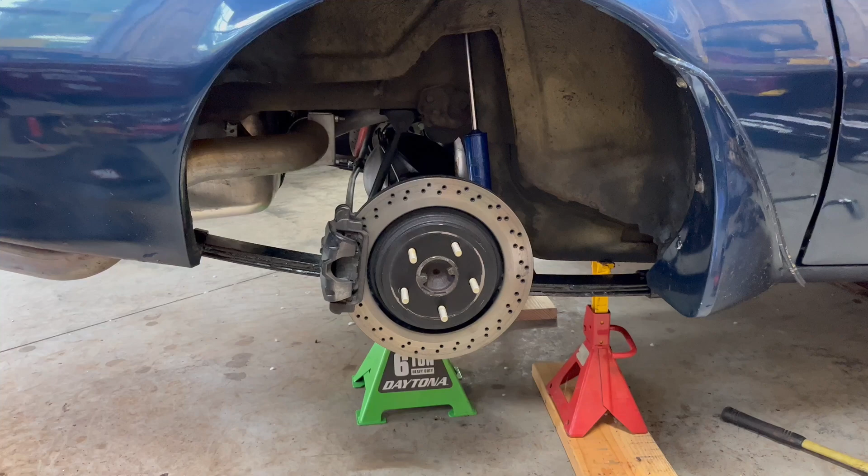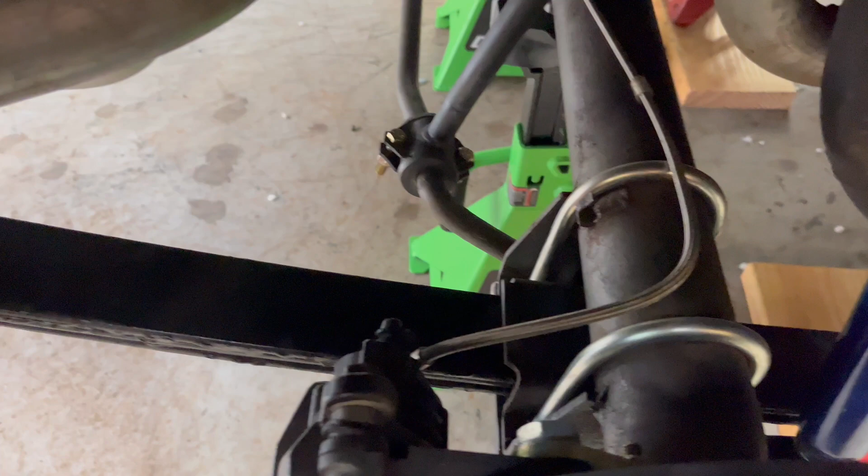As I've said in my last video, all the rear suspension parts for the Firebird have come in, and I finally had a chance to start working on it. As always, this is the first time I've ever done leaf springs, so it was a learning experience. So I did the passenger side just to get acquainted with the process, and I'm gonna get ready to do the driver's side.

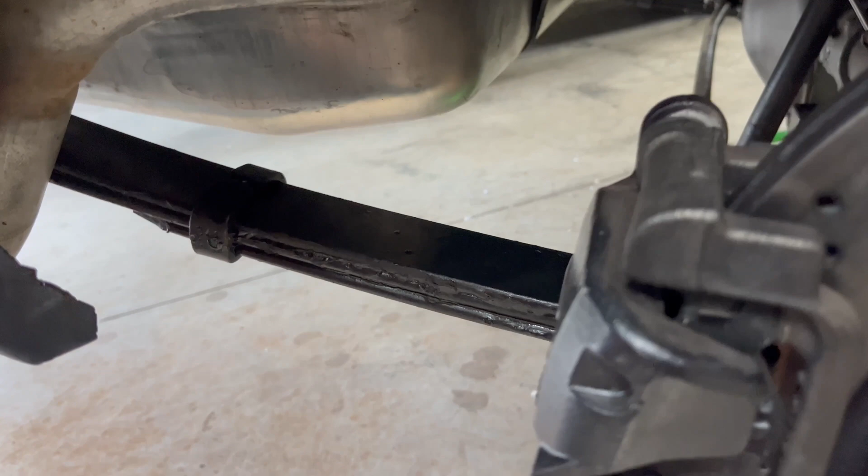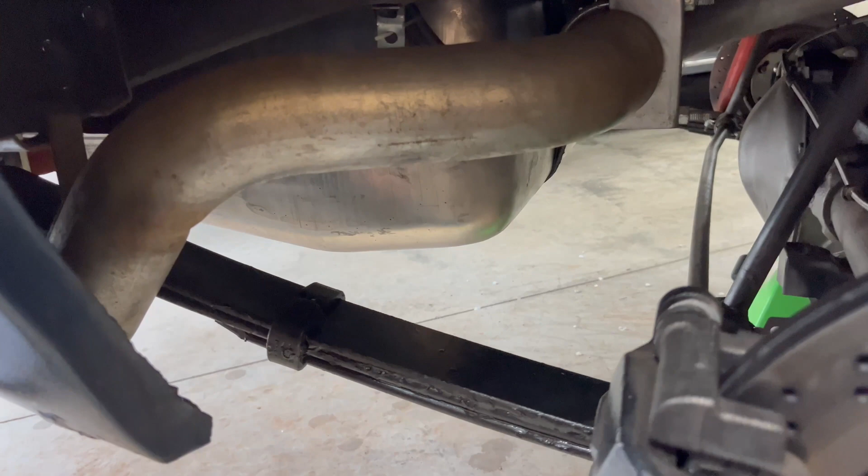I decided to do this backwards so I can go over a couple of things before I go to the other side. First, and the most important in my mind, is the gas tank. If you have the original rubber bushings in the back where the shackles are, if you can, get rid of the gas tank, drop it, because those things get stuck in there, and with the gas tank in the way, it turns into a real process.

I was able to do it without the gas tank out of the way, and it turned into a pain. A couple of the bushings up on the frame end were caked in there, so it took forever with a small C-clamp and a socket to push them all the way out. That would have been easier if the gas tank wasn't in the way. I would have punched it straight out. Same way during installation, it just gets to be a pain.

So I know a lot of people say you can do it with the gas tank in, and you can, but it takes so much longer. Unfortunately, I had a full gas tank and no way to empty it, so I kept the gas tank in place.

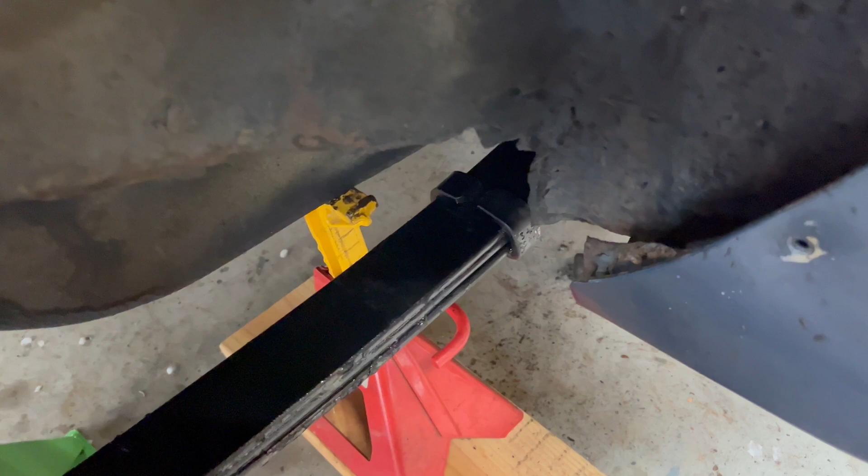Second thing is, if you can have somebody give you a hand, it makes life so much easier. Again, I did it by myself, and it was a bear, especially putting it back in. It was an absolute nightmare, especially trying to get the bolts in at the shackle end with one person trying to make sure everything works. So either way, the thing is in.

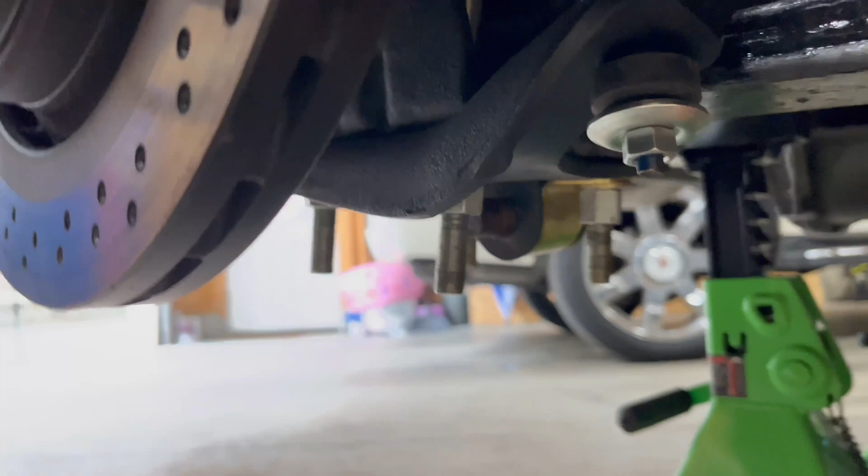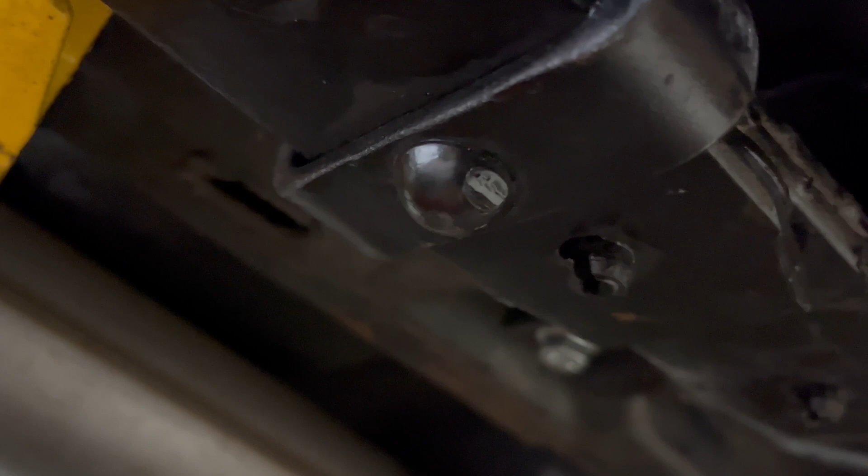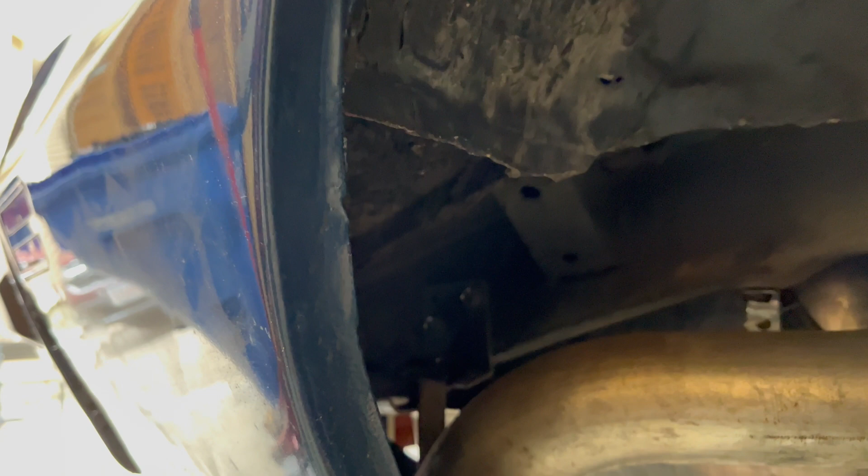I got all new hardware for the sway bar bushings. Also, the kit came with all new hardware for the leaf spring pad, and new hardware for the leaf spring bracket in the front. On this side, I've tightened everything except the bushings on either end of the leaf spring. Those stay relatively loose until you put the wheels on, and then you shake the car up and down a couple times so everything settles, and then you can tighten it.

Also, I have the shock in, but when you do that, the shock needs to be out. I'll just pull it out and go through the motions of the suspension, and then put the shock back in and tighten everything to spec. So I wanted to show you a couple of things.

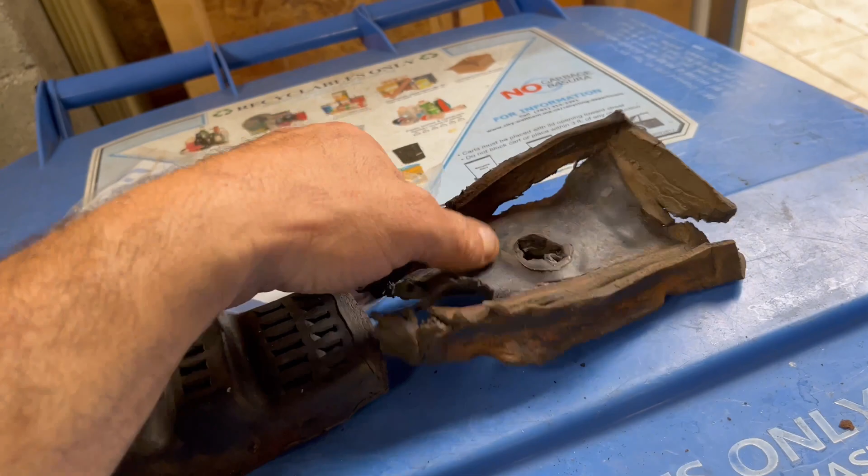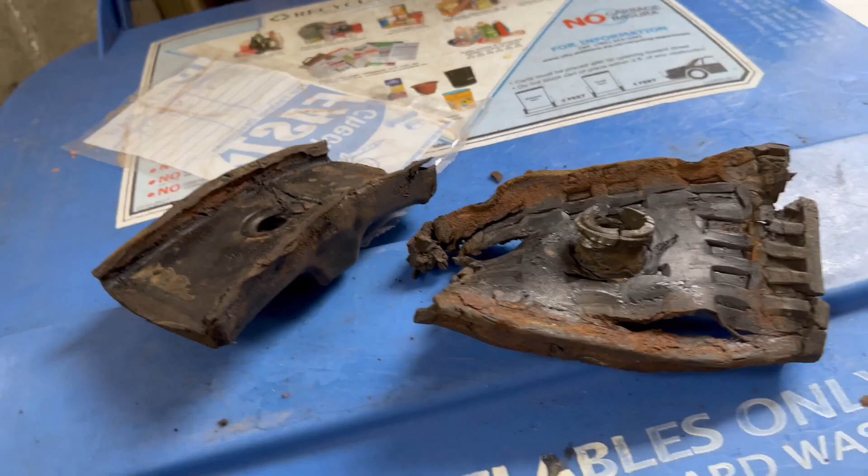These are the original spring pads. This is the bottom one. You can see how bad that is. And this is the top one that sits between the axle housing and the spring. And somewhere here, believe it or not, there's still the factory part number, 477818. I can't make out what the others are. FK something, but I couldn't find a part number on this one. Those are the spring pads.

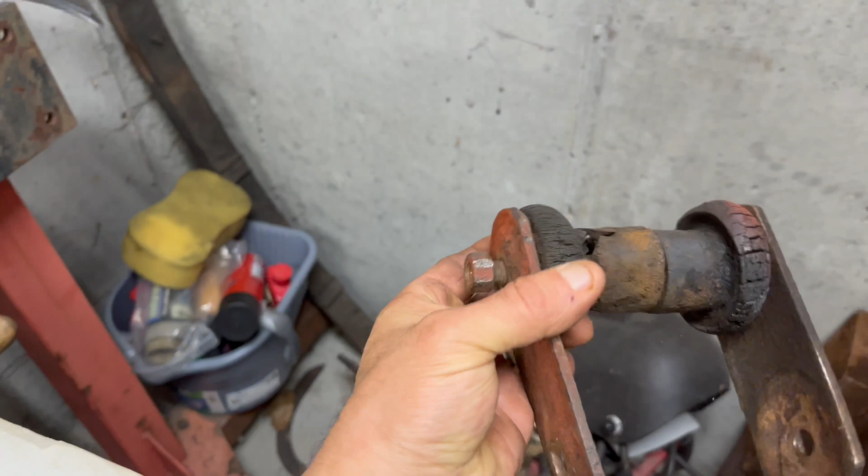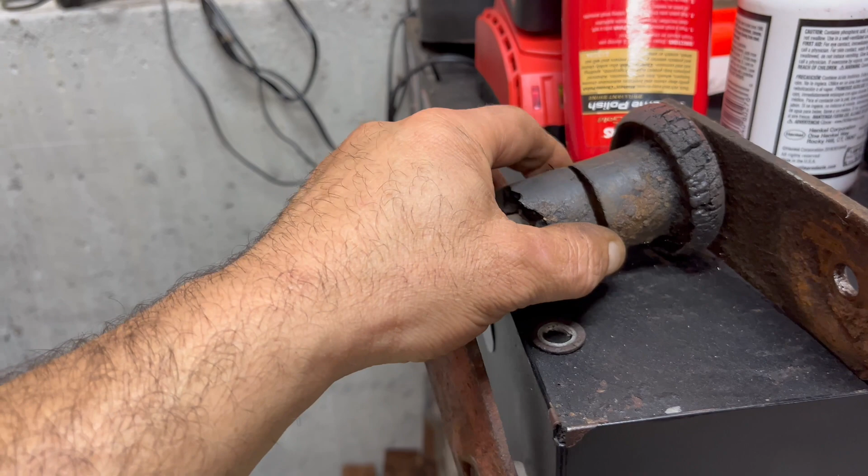And if we go over here, you can see the condition of the bushings. That's the bushing up top. When I took it out, this part stayed in the housing and would not budge. You can tell it's stuck in there. That's the one that I had to use a C-clamp to push out, and it took a couple hours of working it back and forth. Finally got it out.

If the gas tank was not in the way, I would have just pressed it from here, got a little extension with a socket on it and a hammer and just hammered it out. But since the gas tank was in the way, there was no room, so I had to improvise and come up with a C-clamp that just pushed it out barely. It was a small one too, like a 4-inch C-clamp, barely got it.

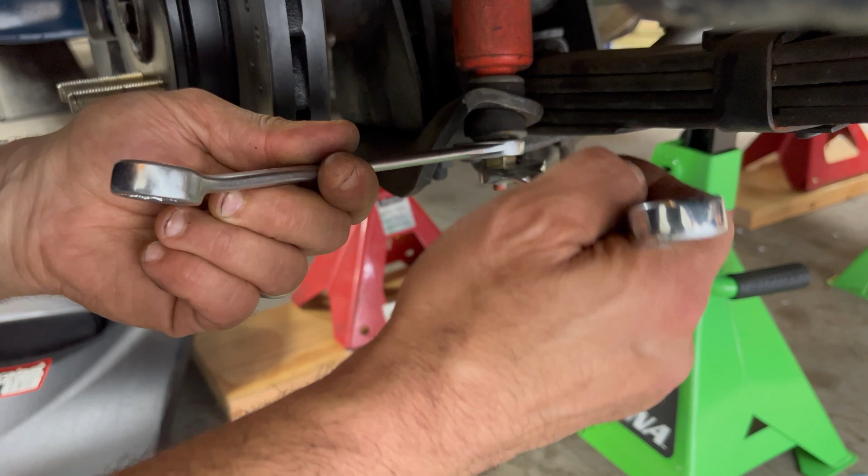So now I'm going to start taking apart the driver's side. I'll film that one a little bit because now I have an idea of what I'm doing. I didn't have an idea when I was doing the passenger side. So here we go. We'll start by taking the lower nuts off the shock.

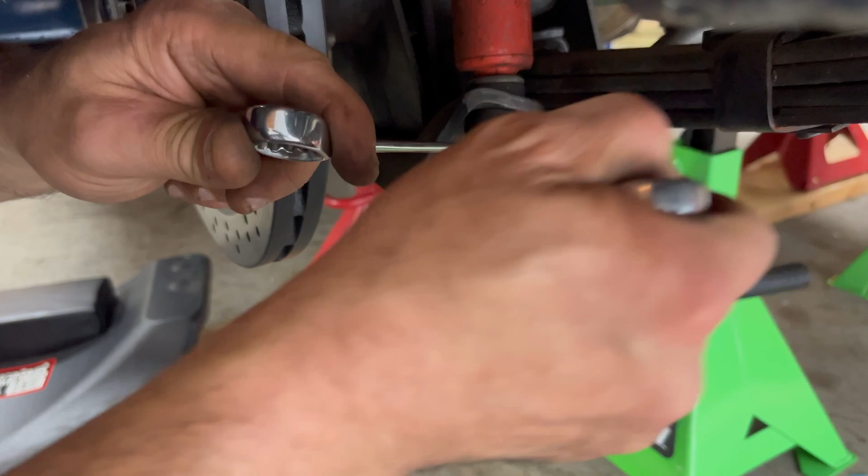Mine is a Koni and those have 17mm nuts, so yours will vary depending on the shock. We'll have to take those 2 bolts out. They're 1/2-inch head bolts for the upper shock mounts. So once the shock is loosened up, now we can start with the spring.

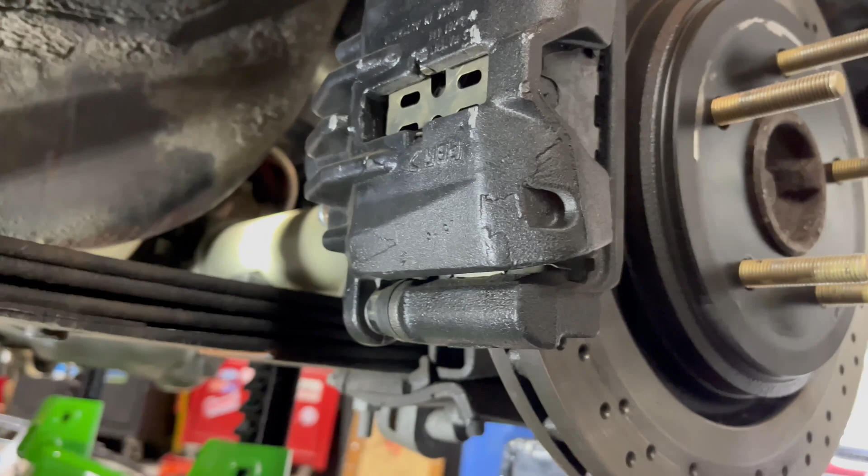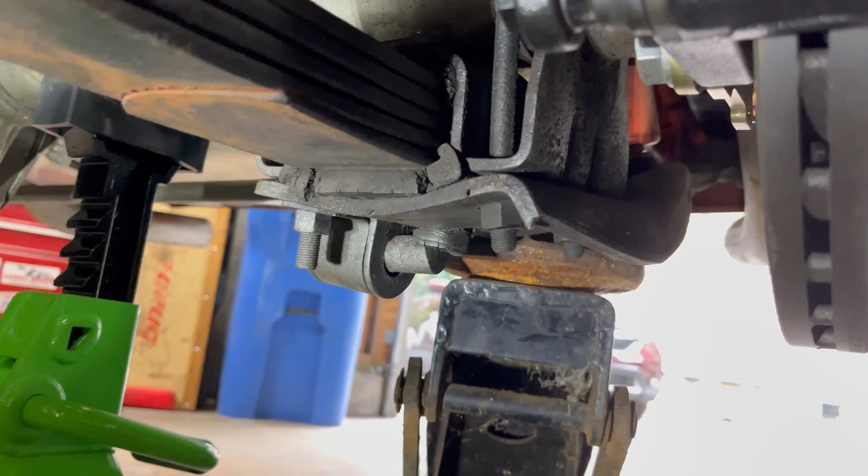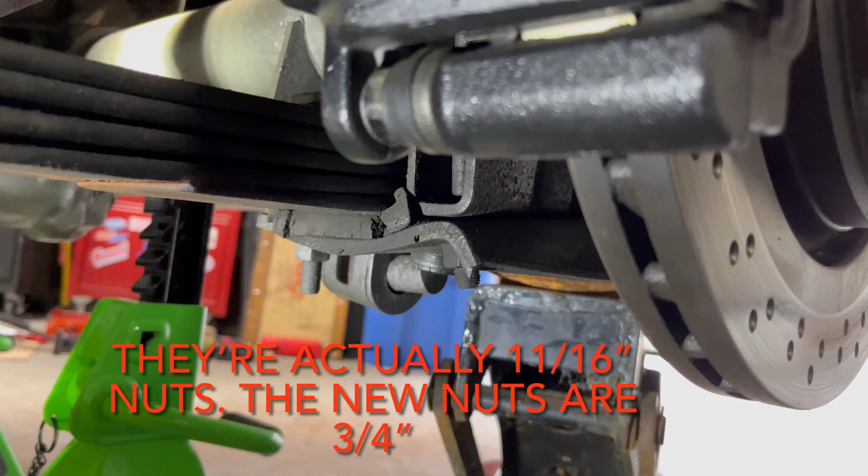Make sure you have jack stands under the rear end and then also under the frame so you can support the car. And then start taking it apart. The bolts for the bottom plate are 11/16. So I'll get the gun with the 11/16 socket and start getting at it. And then we'll move here.

The front spring pocket has 3 bolts. 1, 2, and then there's a 3rd one in here hiding someplace. There it is. That's the 3rd one. I got lucked out on the other side. They came out very easily, so hopefully this side will be the same.

You can see the bushings are rotted. I'm gonna show you here. You can see how the bushings are completely gone. So like I said earlier, I had a tough time getting those out. The top one especially. The bottom one comes out with the spring, so that's not a big deal. The top one is the key. Hopefully I can get it out easier than the other side, but we'll get there soon.

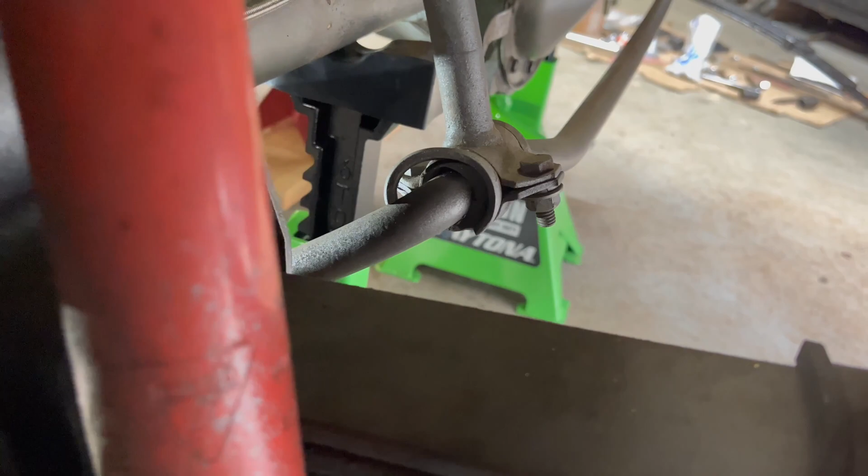I'm gonna start taking the bottom plate bolts, and also make sure you have a jack underneath the leaf spring so it doesn't bounce down on you. We'll do the sway bar link, and that will free up the plate to drop. All 4 bolts or nuts came free, so we're making good progress. Basically the car's rear suspension has never been apart. It's coming out pretty good.

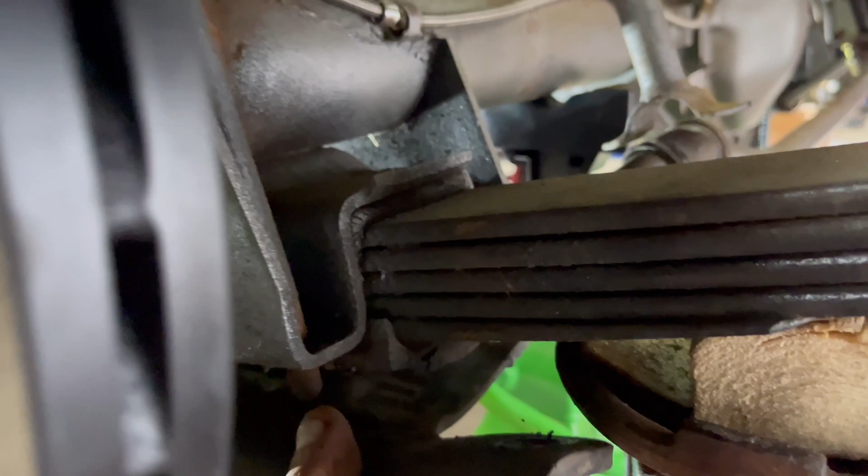I did change the sway bar bushings like 30 years ago, so at least the sway bar bushings have been out once, so those bolts are a little easier, but either way they're still old, so we'll take those out and then we'll start with the front spring eye pocket and then we'll move to the rear shackle. The plate out, the shock can come out. And there's the spring plate.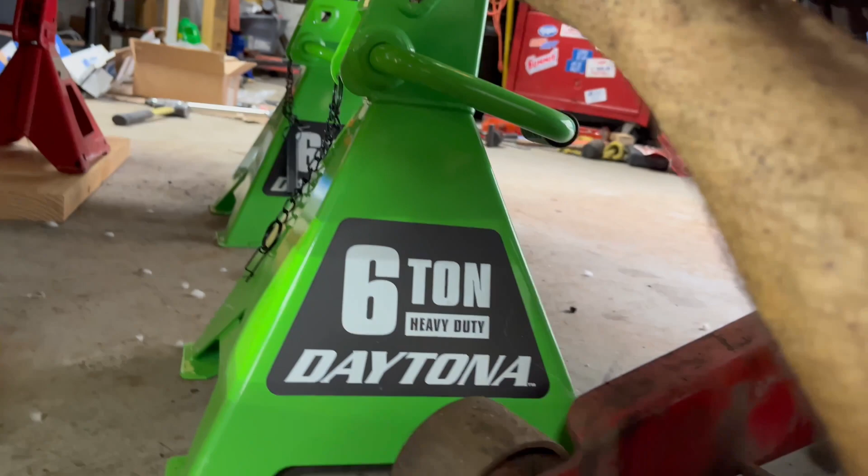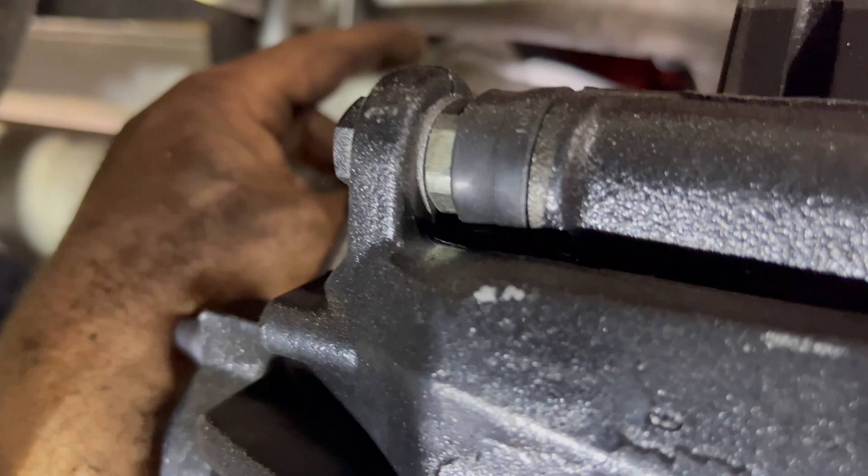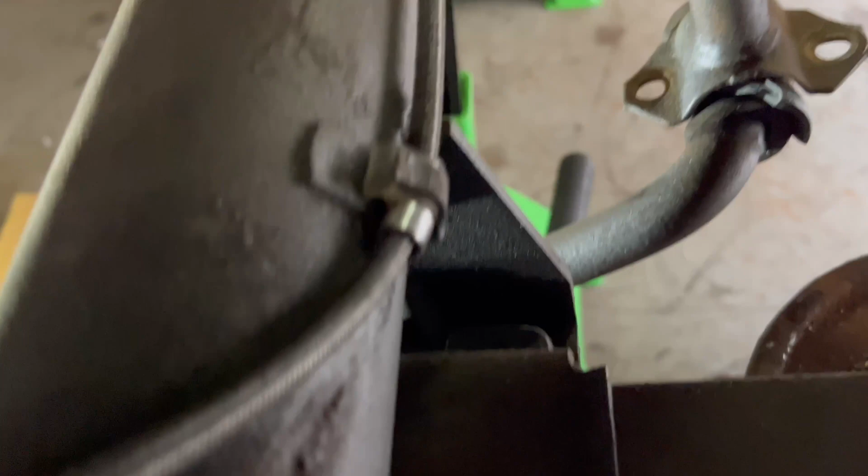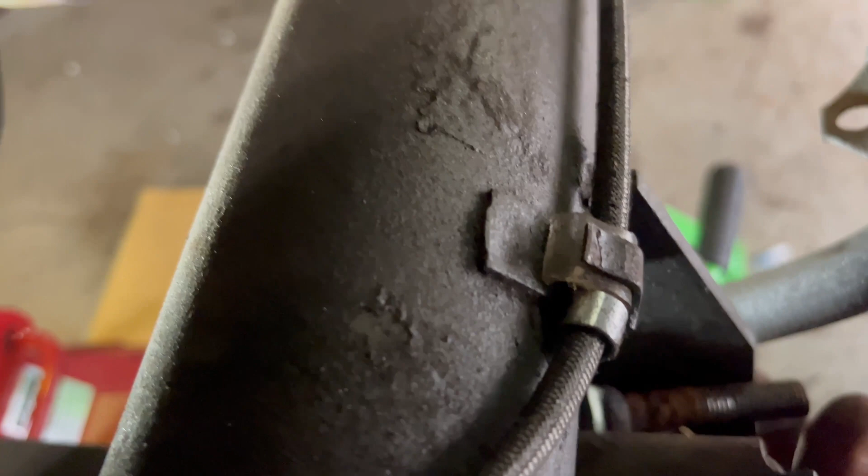Once you loosen up the sway bar and the shocks, there are U-bolts on the inside, and then be careful of the brake line, but there's the U-bolt here, and then there's another U-bolt here. That comes out. So the middle part of the spring perch is out. Now we move to the front.

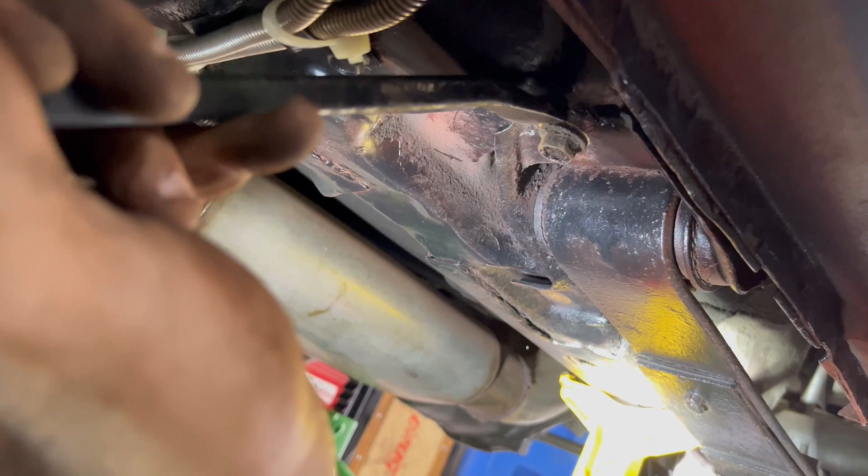We get those 3 bolts out of there. See how it goes. 2 out of the 3 bolts came out. This one decided it didn't want to cooperate and is just rotating inside. I think the clip inside is broken. So 2 ways: either put pressure on it with this, push it down a little bit and get the bolt out that way, or when I drop the rear shackle, put some weight on it, get the bolt out that way. See what I can do.

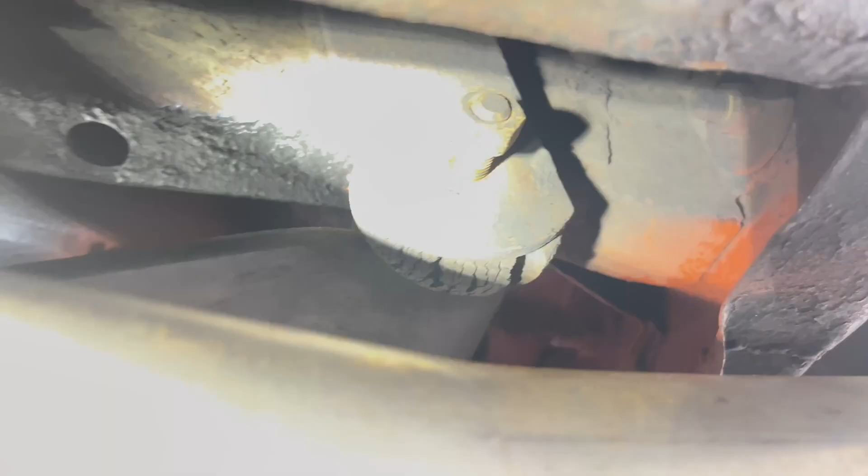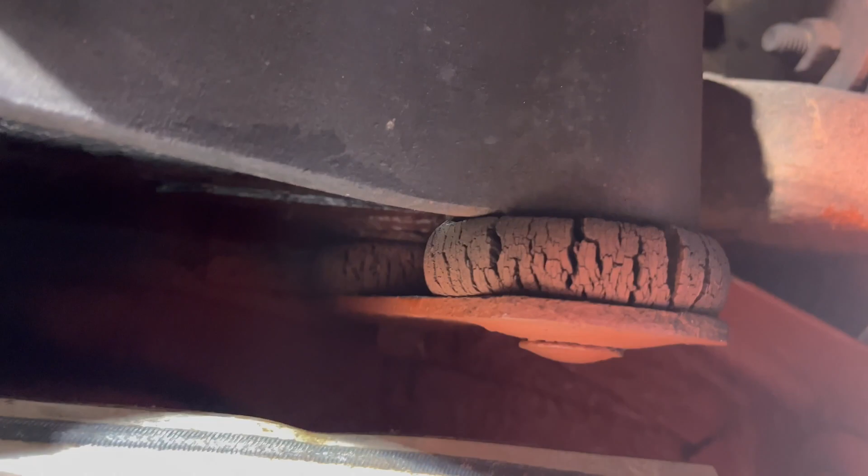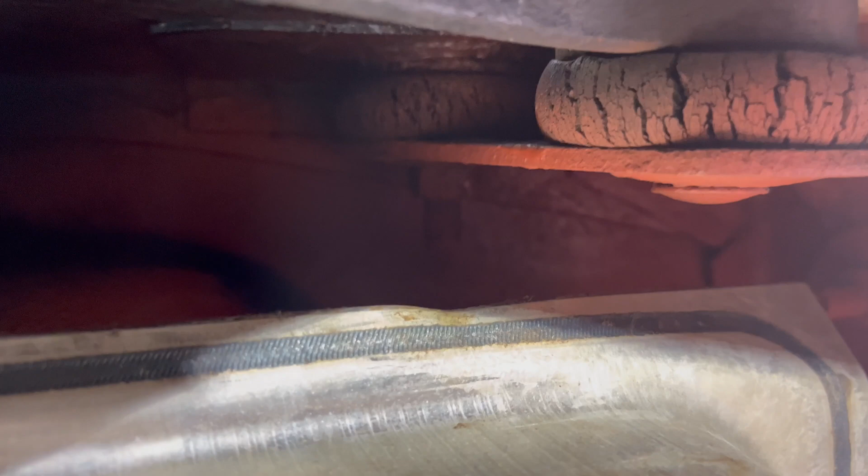I'm starting to take the shackles out. It's an 11/16 nut. And like I said at the beginning of the video, the gas tank gets in the way. So there's the bolt head, and it has no room. There's like an inch, maybe inch and a half room for the bolt. So that means I have to take the top shackle out for the whole spring to come out, which is a pain in the neck. Hopefully that bolt will come out.

That one, you can push the bolt out up top, and there's enough room in the back there between that and the rear fender for the bolt to slide out, hopefully easily, and the whole thing will drop. So again, if the gas tank was not there, you can just bang this bolt out, the spring will come down, and then you can take the top shackle out much easier, but whatever. It is what it is, we'll make it work.

So I'm gonna continue taking this nut out, and then we'll start with the top one, and then the whole thing drops. Once that drops, go back to the front spring pocket, the front bolt. Hopefully with enough weight on it, it will start backing out. So see how it goes.

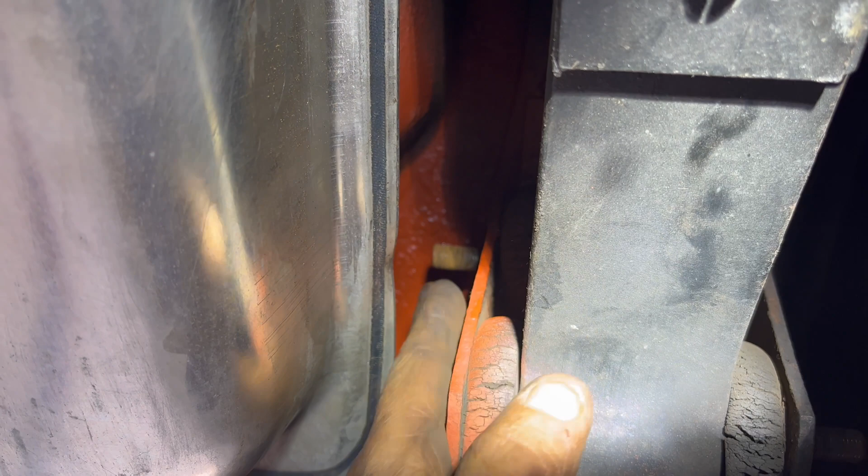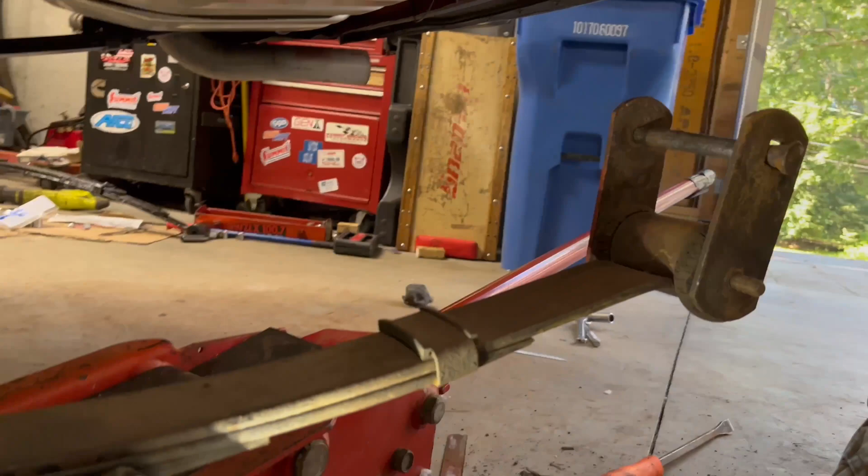So both nuts are out. Again, if the gas tank was not there, I would have hammered that bolt out, but I gotta C-clamp it out because it's in there. It's never been undone since it left the factory almost 50 years ago. So it's gonna be fun, just like the other side. I've got to put a pry bar here and move it around, and then get my C-clamp and put it there and press it out, see what happens. So after struggling with it, got the upper shackle bolt out.

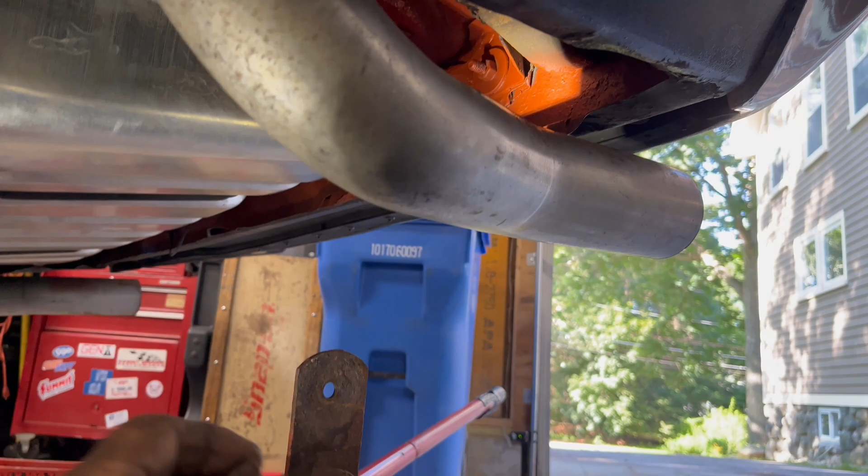I went with the Sawzall, because that thing was in there. But now the fun part comes in. As you can see, the bushings are in there, and they're in there pretty good. So probably gonna do like the last time, go in there and get as much of it as I can, and the rest of it I have to get the C-clamp again with a socket and start. Hopefully I can press it out and see what happens.

This side came out easy. It's like a couple of minutes, and I was able with my pry bar to pry them out. So it's the first good thing that happened today on this setup. Anyways, onward. I'm just gonna clean the hole a little bit, get rid of all the dirt and stuff, and then continue on. Probably press the new bushings in, and then see if I can get the spring perch off, the old leaf springs, and then we'll restart the assembly.

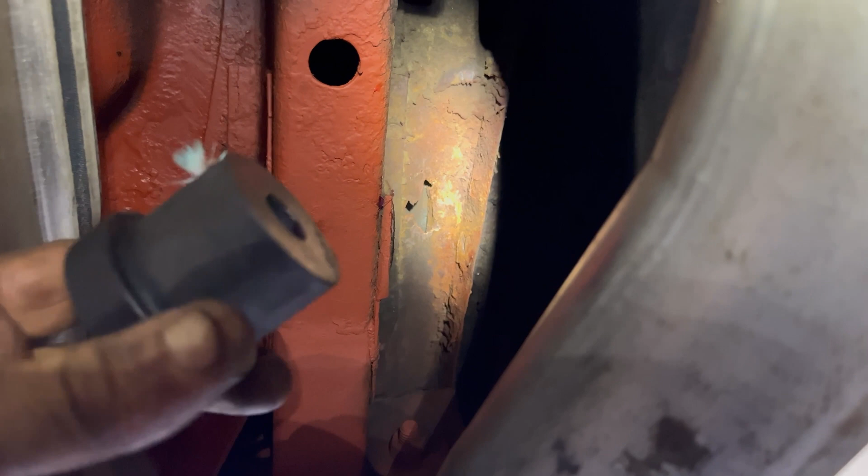So the next issue we'll run into is the kit was supposed to come with the rubber bushings for the frame side of the shackle, so it will slide in easier, but it didn't. It came with poly bushings, and there is no way this thing is sliding in there. It's like less than a 1/16 of an inch difference between the diameter of this one and the original factory one, and there's just no way. It just will not.

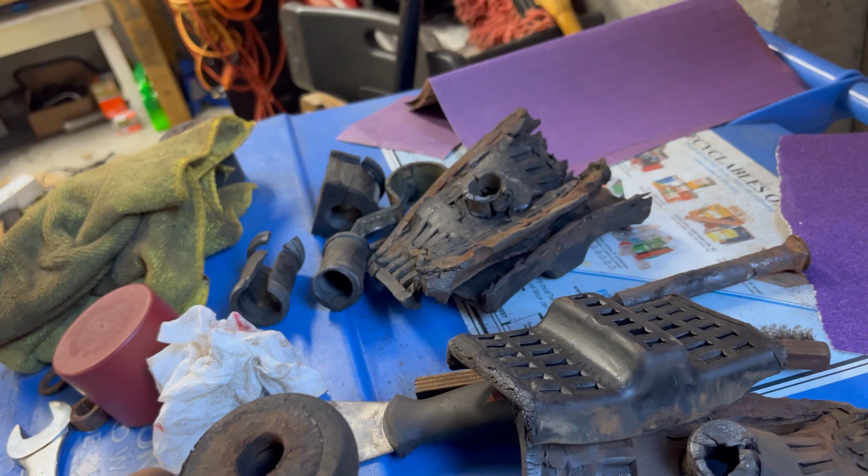So what I did on the other side is I shaved a little bit of the outside diameter, just enough so I can press it in. So that's what I'm gonna do. Since I have the old factory ones that came out, I'll just show you the difference. Since the polys won't compress like the rubbers, it just will not go in there. So let's see. So here's the, it's barely visible, and it's almost the same size, but the poly is slightly thicker.

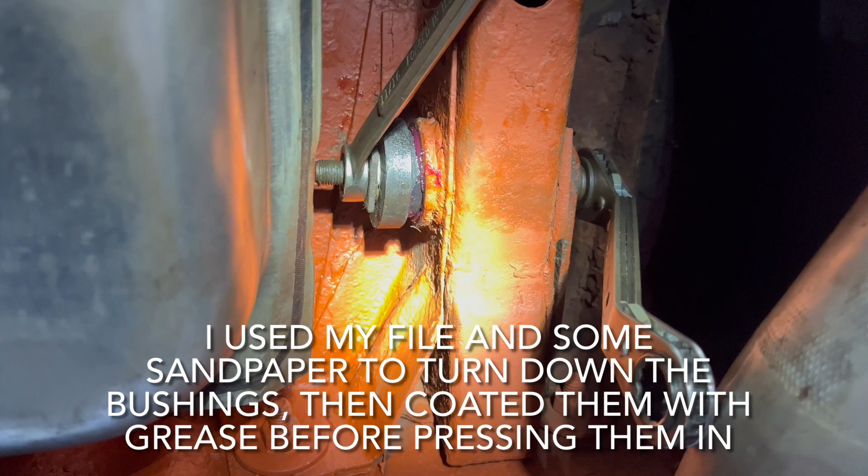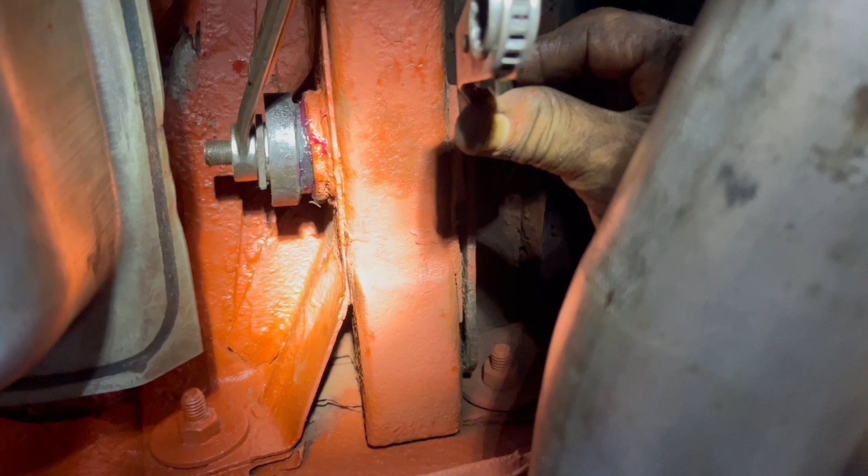And so here, pressing the bushings in, I just got a long bolt and nut and some washers. I used the shackle plate on the empty side and just nut and bolt, and then pressing the bushing in. As the bolt tightens, obviously it's pushing the bushing in all the way, almost there, probably like less than a 16th, and it should get there. Once that's done, I'll take it out and press the other side, and then the bushings are ready, and then we'll start the reassembly. So pressed in the other side too, so the frame side bushings are both in and ready to go.

So we're back at it this morning. I got the spring perch out. I had to sawzall the bolt because it was not budging. I think over the past 49 years or so, it's welded itself to the bushing. So hack it off, clean it up a little bit, give it a coat of paint, and then we'll start reassembling this new spring. So we're waiting for the paint to dry on the front spring perch and start reassembly.

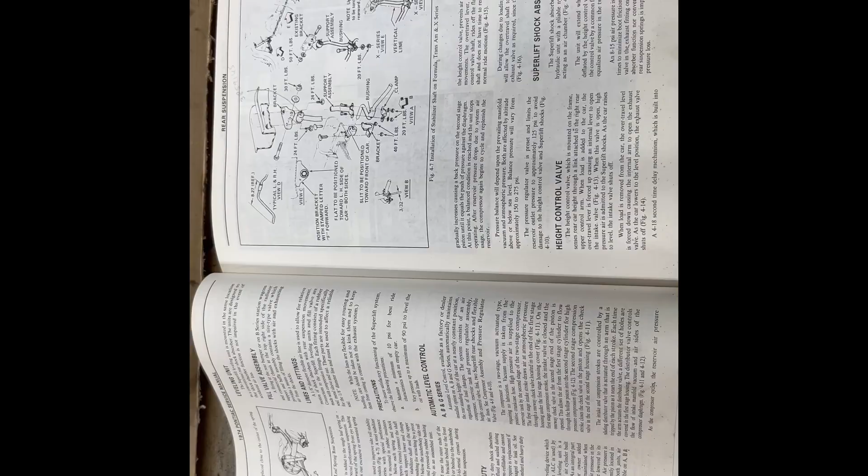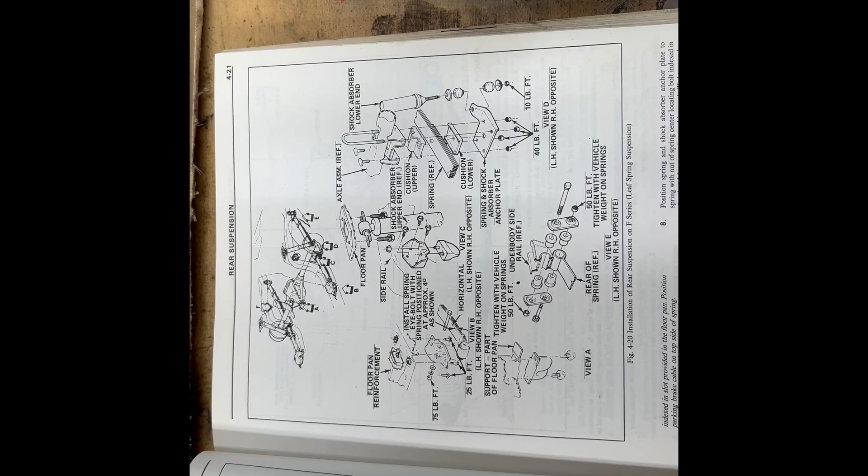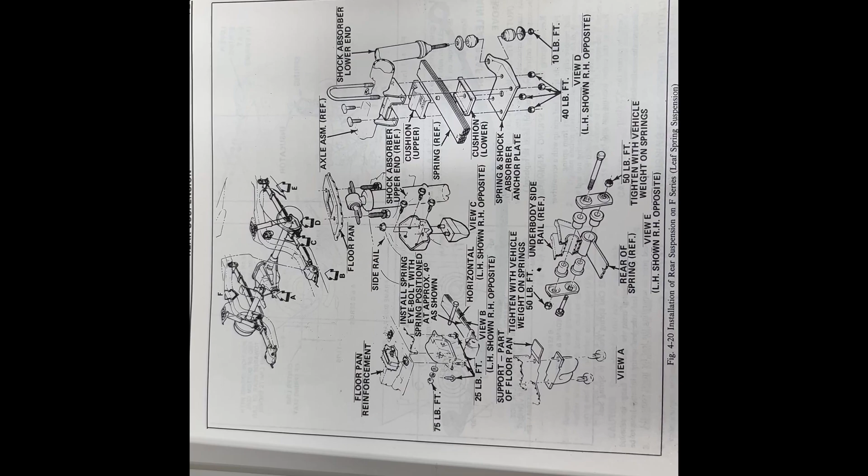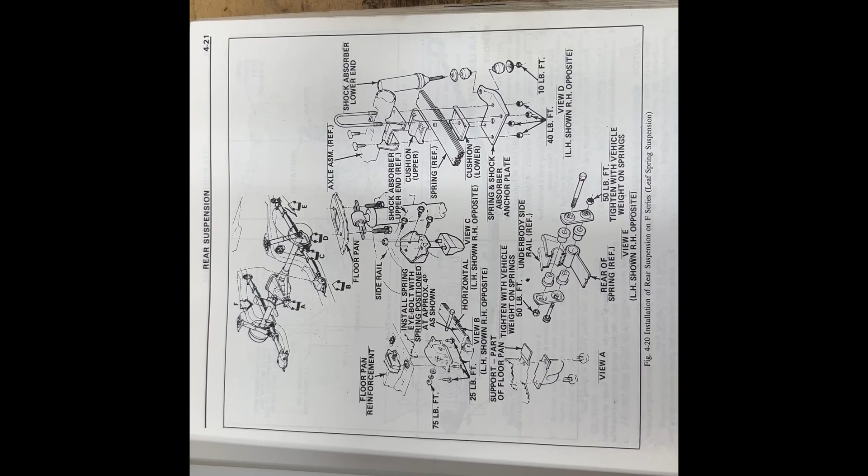And from the 74 Pontiac service manual, the rear suspension, this gives the torque specs on the sway bar bushings and the links, and in here is the rear suspension, all the torque settings for the springs, the spring plate and the shackle end and the pocket end, and also the shocks. So I'm going to start with the sway bar because I painted those yesterday, the drop links, and then continue on as it dries up, then we can put the spring in. But if you guys want the torque specs per the factory, these are it.

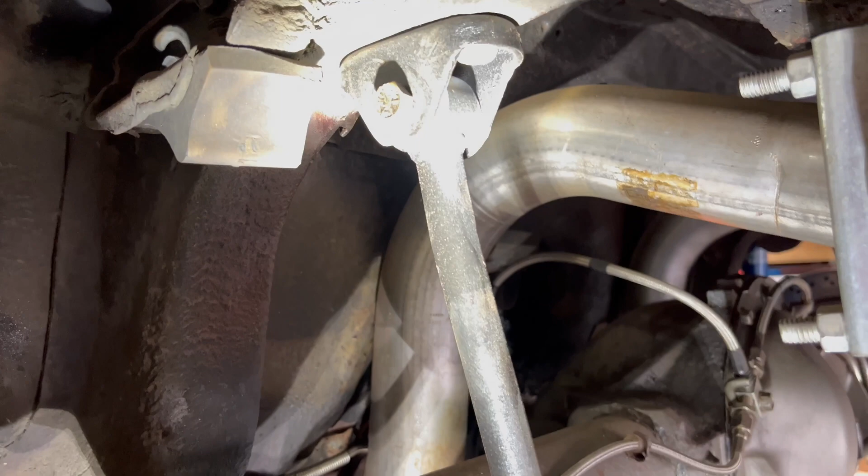So we'll continue on. I just mounted the drop link upper mount and just put the drop link in there loosely for now, and then I'll mount the bushings there. The spring pocket is dried up, so I'm going to start assembling that one and then start putting the spring in. Put the perch back in the front eye. I got all new hardware for it because I had to cut the old one.

So when you put it on, you're supposed to just install the bolt through the eye and have it loose. So when everything is installed, you're supposed to bounce the car up and down with the wheels on, so everything will settle. Then you tighten everything.

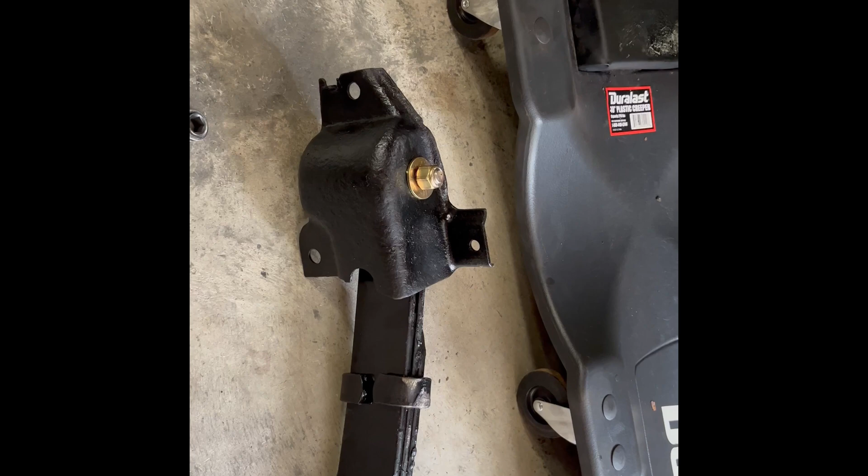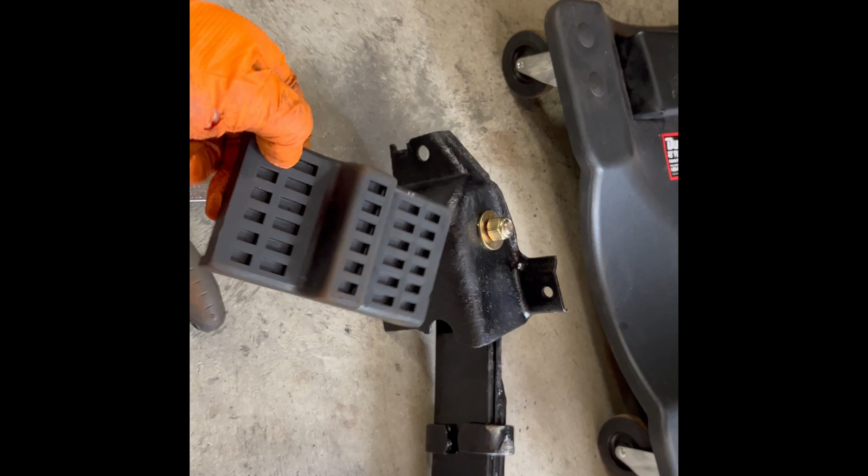So everything is loose, and now I'm gonna take the upper bracket that goes between the spring here and the axle, squeeze that in there, and then get the 3 bolts for here and mount this to the front, and then move on.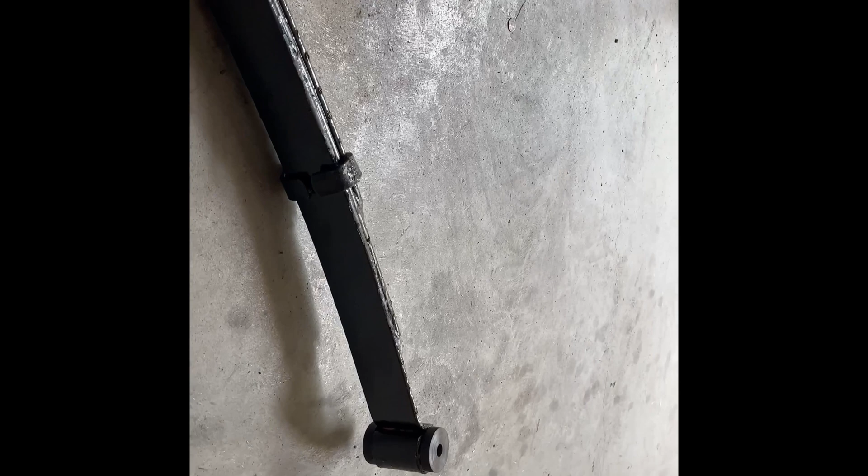The way it worked best for me was I put these on first, didn't tighten them, just screw them in, then put the middle U-bolts through the axle, and then went to the back shackle, and that's how it works. So I'll show you how I do it.

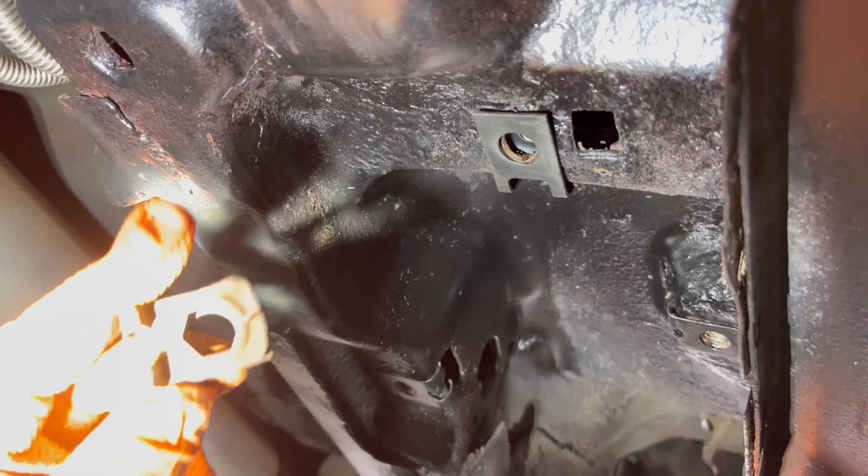Remember yesterday I was having trouble taking this front spring perch bolt out? Here's the reason. I had to take the old one out because the captured nut that was part of it had broken off. So luckily the kit I had came with 6 new captured nut fittings, but the others I chased them, they're all good, so I only had to replace one. So I just put the one in, and now we're ready to go.

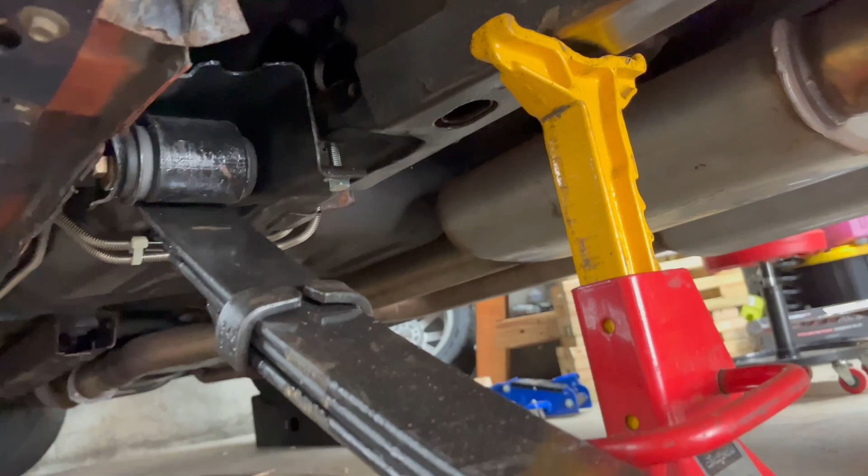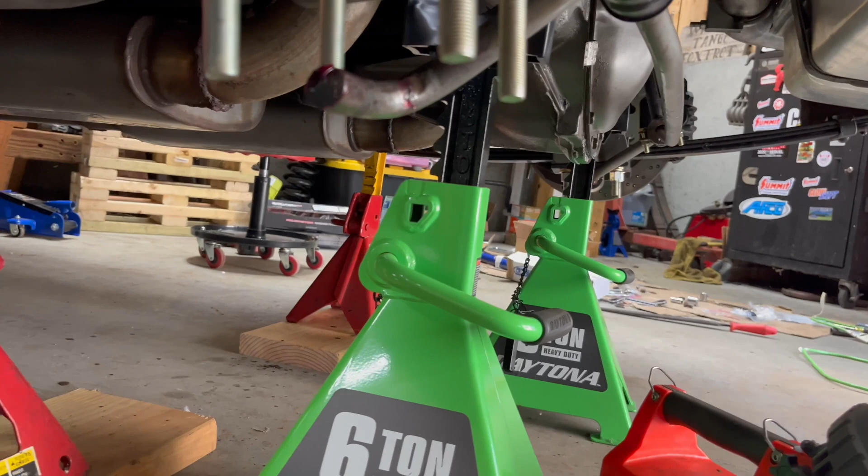So now that I have the front spring perch loosely bolted in place, it's time to put the spring back in its place, the new spring. So the way it's gonna work is start from the front, then I'm gonna jack up the spring, put it in a spot here. I already put the rubber isolator on top, and then bolt it up. I'll get this sway bar out of the way so we can put that plate in, and then we'll jack it up and put it in the back.

The way it worked for me is I had to put this outside plate in with the bolt. The top bolt at the frame goes from the rear fender side in. I didn't put it all the way in because I got to put the spring up and put it in the hole. It won't work. So in the other end, the bolt goes in from the gas tank side to the outside because it won't go in the other way.

So once we get the center by the rear axle in, then I'll have to finagle that into place and bolt it up. It's not the easiest thing, but we'll get it done. This is where a second pair of hands will work.

Additionally, the kit I got from Pro Touring F-Body came with 1/2-inch U-bolts. That means if you want to use those, you have to enlarge the holes both on the axle and on the plate to 9/16, so the bolts would go in, otherwise it won't go in, or you can use your factory hardware. I elected to use the new ones, so I ended up drilling the holes and enlarging them. Also same with the sway bar end link bracket. You have to enlarge them to fit the new 1/2-inch U-bolts.

So now I'm going to put the jack underneath the spring, jack it up into place, and then go from there. See how it goes.

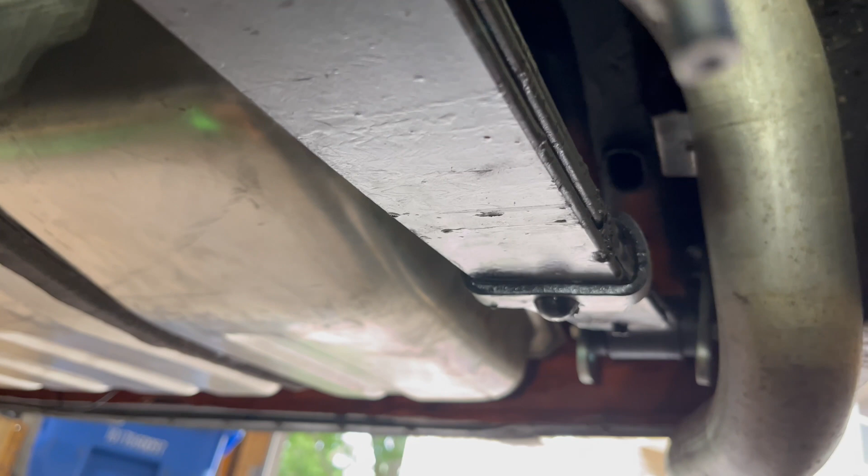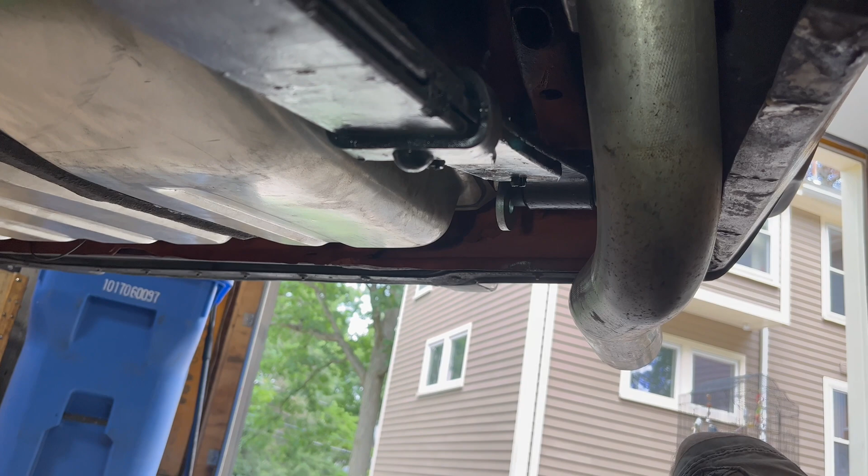So after much fighting with the spring in the car, I finally have the spring mounted. All the spring eye bolts are in, but they're loose because I gotta put the wheels on, put them on a flat surface, and then bounce the car up and down so the springs will get in their position correctly, and so there won't be any binding. I lubricated all the bolts.

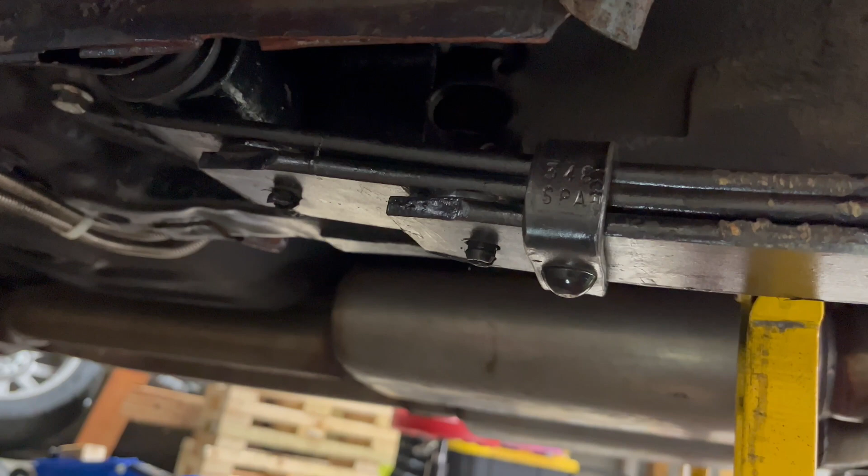I tightened the center plate to the factory spec 40 foot-pounds, and then the front spring perch were at 25 foot-pounds, the 3 bolts that hold the perch into the body. The eye bolt, I haven't tightened it. The front eye bolt calls for 75 foot-pounds of torque, so once I bounce the car up and down, then after that I'll tighten it.

Per the specs, instructions with the Pro Touring F-Body kit, it said not to install the shocks into the plate so you can bounce the car up and down. So that's why they're hanging right now. So we're almost there.

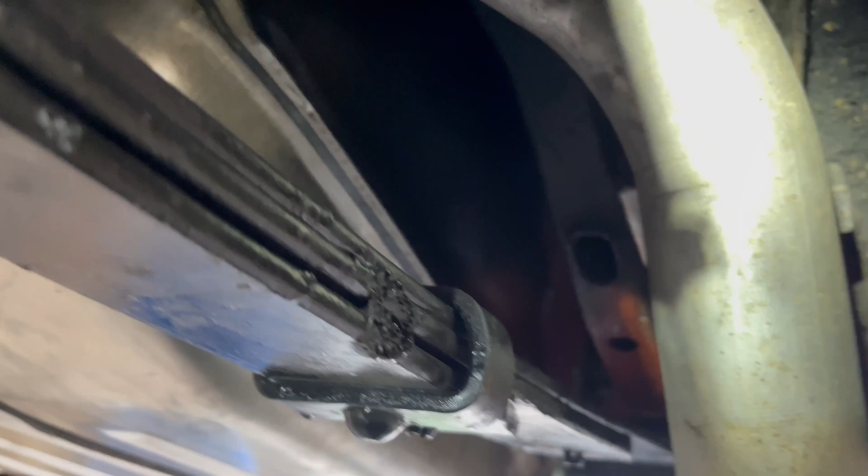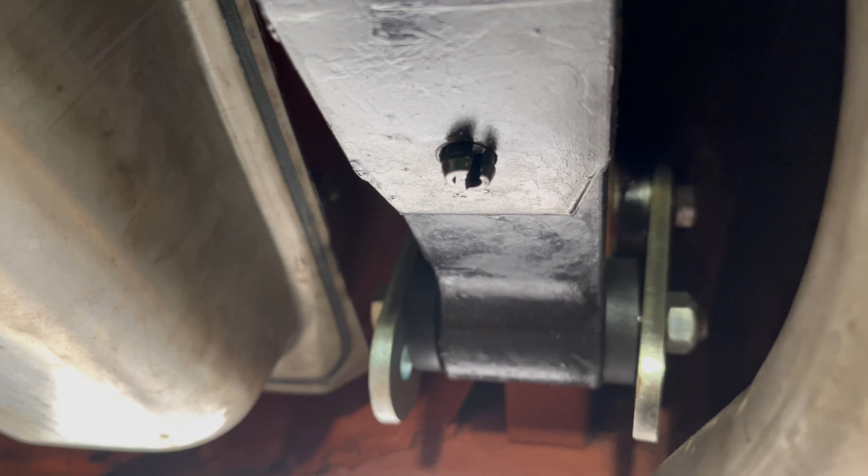One note, if your car likes you, everything will go in smoothly. If it hates you, like my car hates me because I've touched its 50-year-old hardware that's never been off, then every step of the way was a fight. Even putting the bolts and the bushings up top, I had to literally put the socket set on it and turn it so the bolt would go in.

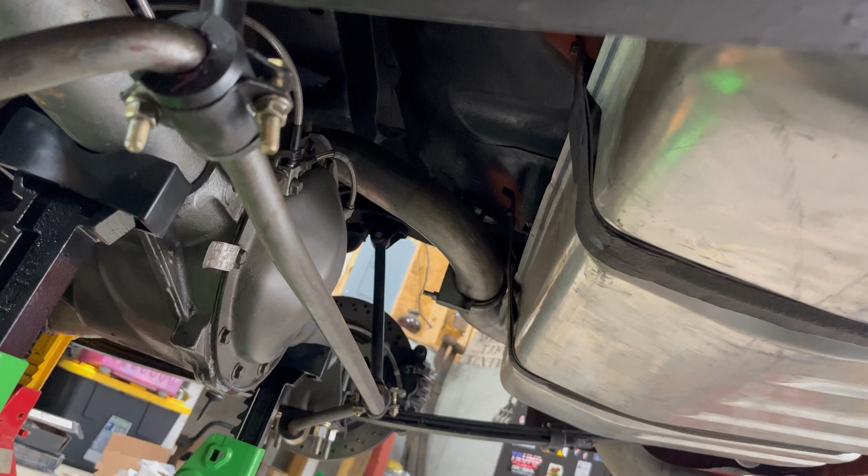So anyways, this has been a fight, but finally got it done. The sway bar bushings are in. One note on those, the aftermarket polyurethane bushings, the outside diameter is a little too big for the factory drop link.

I don't know if the 75 and up are different design. Maybe that's what it was meant for, even though the spec called for 70 to 81. 70 to 74 has a different drop link design than the 75 to 81. But it's in there. Everything is tightened on the sway bar end, drop links and the ends.

So now I'm gonna put the wheels on and then bounce the car up and down, and then put the shocks, tighten the eye bolts, and call this a project. And then the only thing left is the matching front shocks. I'm gonna swap those,

and hopefully with the new suspension, the body levels out so the front left does not sag as we posted before. If that's the case, then I'll go back and swap the front springs to the matching Pro Touring GT Pro springs.

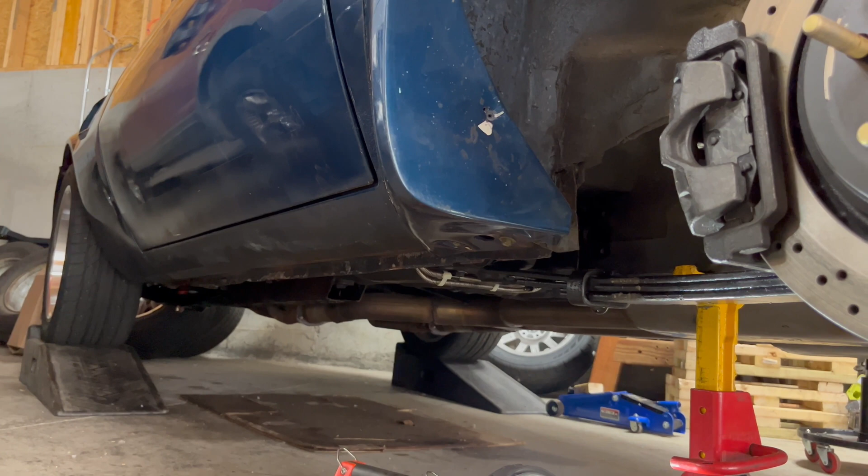Otherwise, if it's still crooked, then it's gonna go to the body shop and go on the frame machine and level it that way, and then put the subframe connectors, and then I can put the GT Pro springs in front coils. So I'm gonna put the wheels on right now and bounce the car and then call it a day. So the wheels are back on the car.

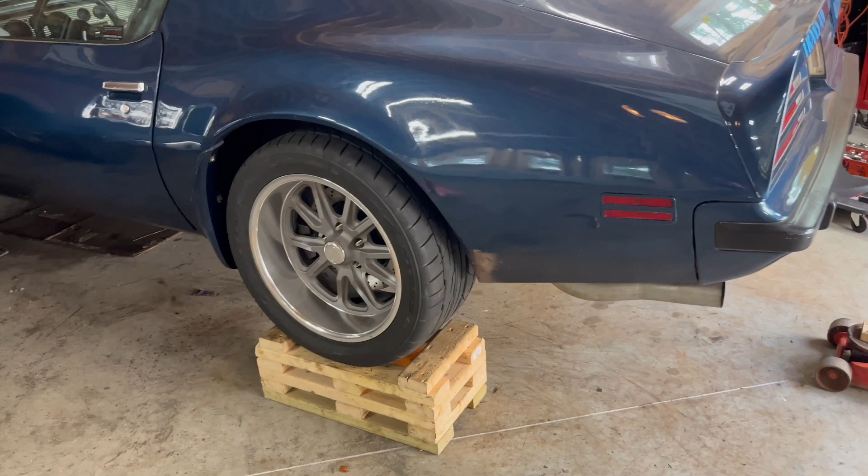Because of the width of the tires, I had to take the shocks completely out because they were hitting the rubber. So before I put the shocks back in, we're gonna bounce this thing a couple of times so the springs can seat themselves, and then tighten to the torque specs, take the wheels out, put the shocks back in, put the wheels back on, and then the rear end will be completely done. So let's see how it's gonna work.

So gave it a few bounces. The springs are so stiff, it's not jumping up and down, but that's all right. The instructions call for tightening the eye bolts while the wheels are on and the car's weight is on it. So that's what I'm gonna do now.

Put the bolts back. Tighten the bolts to the specs that are in the manual. I think it's about 75 foot-pounds for the front, and I think the shackles are 40s, but either way, it's in the diagram. I'll look it up. Tighten those, jack the car back up, take the wheels out, put the shocks on, and then that's it.

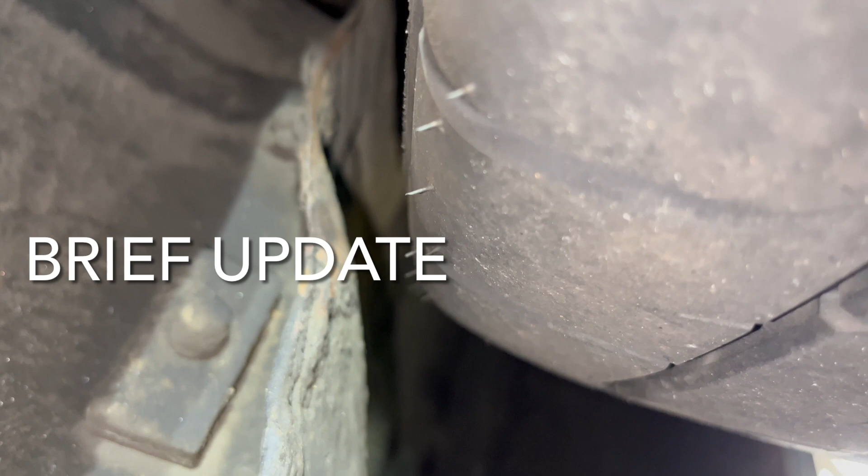And here we have the separation between the seatbelt hump and the rear tire, with the car jacked up on the rear end. So even with 9.5-inch wide wheels with 295/40/18s and the lowered suspension, it's still clearing the seatbelt hump. So we're all good.

I drove it today, and the lack of slop from all the new bushings and suspension is just phenomenal. So I should have done this years ago, but anyways, better late than never. So I was worried about the tire rubbing against the seatbelt hump, but it's nowhere near. There's about 3/4 of an inch separation, so we should be good.